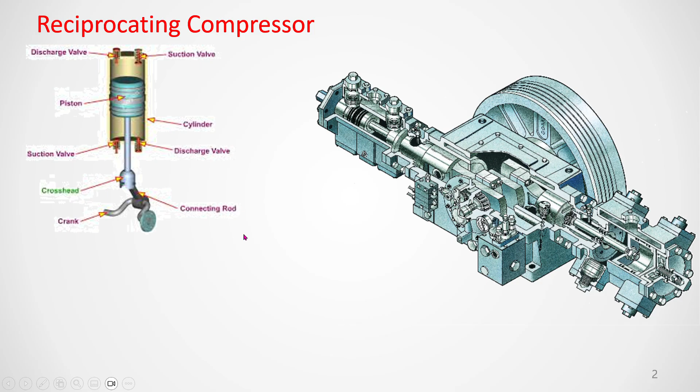So this is the reciprocating compressor. If you see the diagram, this one is your two stage. This one is the crankshaft, this is the web portion. This is the connecting rod, this is the big end bearing, this one is the small end bearing. This is the crosshead, this is the piston rod, and this is the piston. Both these sides have suction and discharge valve. This one is the flywheel, this is the bearing, this is the body, and this is the oil console.

You see the other diagram also. This is the crankshaft, this is the connecting rod, this is the crosshead, this is the suction. This is a double acting type. This is the suction and discharge valve, this is also a suction discharge valve. This is the piston. So the mechanical arrangement transmits motion into the piston's displacing action.

The inlet valve allows a quantity of air to enter into the cylinder. When they move up, suction valve will open, fresh air will go in, and from the discharge side the suction valve will close, discharge valve will open. From there it will go to the process, and in the cylinder it is compressed and discharged. The discharge valve prevents back flow of gas into the cylinder during the intake cycle, so when this is down, it will not allow air from the discharge side back to the suction side, only from suction side into the cylinder.

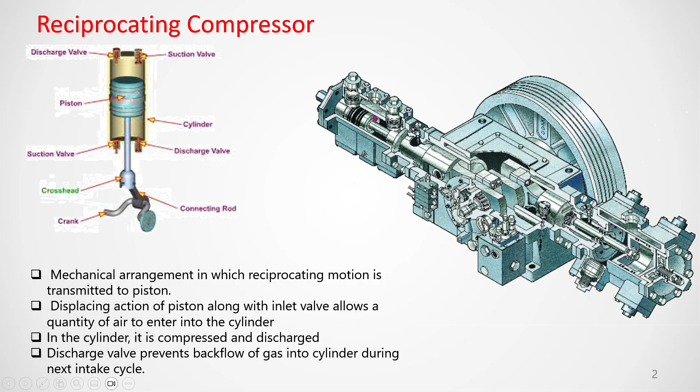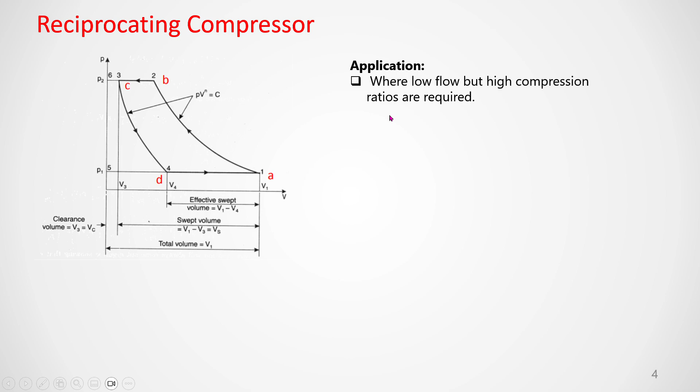And this is the PV diagram of a reciprocating compressor. Reciprocating compressor application is where low flow and high compression ratio are required - that is when we use a reciprocating compressor, and where the gas is dry.

Now the PV diagram goes A to B, D to A. It is suction at P1 pressure and T1 temperature - the pressure will remain same and temperature also remains same. Now what is the volume? This is V, this is volume, and this is VD, so this much volume will go inside the cylinder - that's D to A. Next is A to B compression, compressing from here to here; both valves are closed during compression.

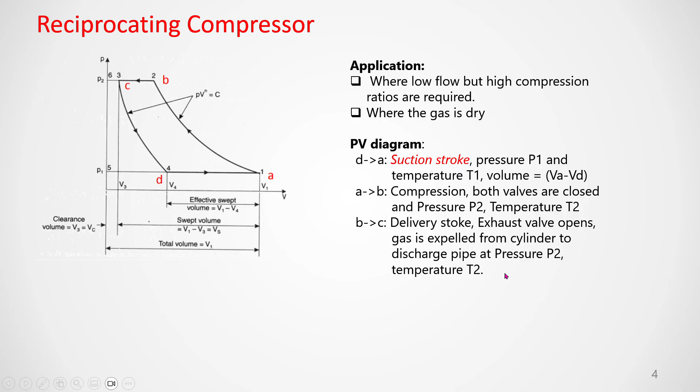Both valves are closed at pressure P2 and temperature T2. Pressure will increase from P1 to P2, then B to C, the delivery stroke, at pressure P2 and temperature T2. The exhaust valve opens and gas will expel from the cylinder to the discharge pipe.

Again, C to D, it will expand during the expansion stroke as the piston moves to the bottom, and the residual gas at the top of the piston head and cylinder head will expand at pressure P1.

The residual gas inside the cylinder, due to the clearance volume, expands until the pressure becomes P1 and temperature T1. Now the volumetric efficiency is the ratio of actual flow, V1 minus V4, to theoretical flow, which is V1 minus V3.

So V1 minus V4 is the actual flow done inside the compressor, and V1 minus V3 is the theoretical flow. So volumetric efficiency is the ratio of V1 minus V4, the actual, to V1 minus V3, the theoretical.

Free air delivery means the volume of air delivered by the compressor at intake condition, not at P2 and T2, but at P1 and T1 — the intake pressure and temperature.

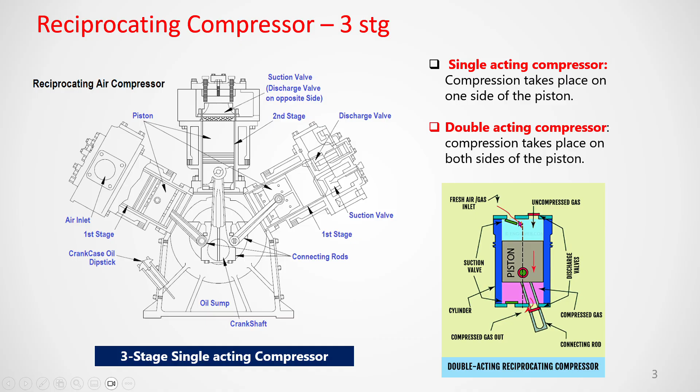Now, the key reason for providing the clearance — if you see the compressor picture, from the top dead center there will be some clearance so it will not touch the cylinder head. That air present there is called the clearance.

Why is the clearance volume provided? First, for mechanical safety — it prevents the piston from hitting the cylinder head. If this clearance is not there, the piston can hit the cylinder head, causing severe damage to the piston. That's why clearance is maintained.

Second, thermal expansion — due to high temperature, everything will expand, including the piston and piston rod. To accommodate this, the cylinder casing is jacketed so the temperature does not rise too much, but the piston and piston rod will still expand since they are subject to high temperature, so some permission must be provided. If no clearance is provided, the piston will touch the cylinder head and can damage it or even jam.

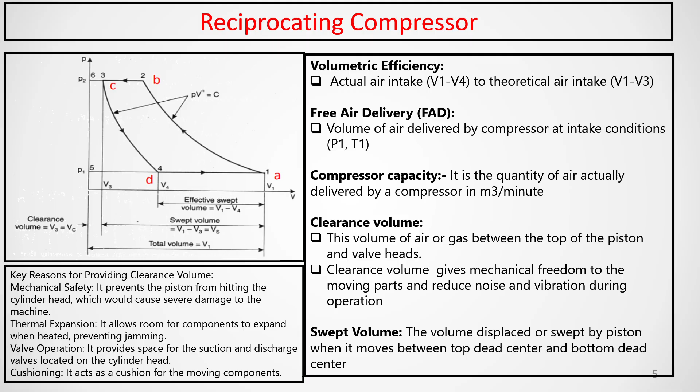Third, valve operation — due to suction and discharge valve operation, it needs some space, which is why clearance is also provided, and it gives a cushioning effect too. These are the four reasons we provide clearance volume, measured from the piston head top to the cylinder head bottom.

Now, compression takes place in the cylinder of a reciprocating compressor through three processes: isothermal, where temperature remains constant; isentropic, where heat transfer remains constant (zero); and polytropic, where heat transfer can take place.

In the isothermal process, shown as C1, P2, P1 and B, the work done will be less. In the isentropic process, the work done will be very high, since isentropic means no heat is given to the system.

So the efficiency of a reciprocating compressor is lowest during adiabatic isentropic compression, because this process involves the highest temperature rise, leading to maximum work input for a given pressure ratio. Conversely, isothermal compression provides the highest efficiency.

In actual practice, the process is usually polytropic, since pure isentropic or isothermal conditions are not possible.

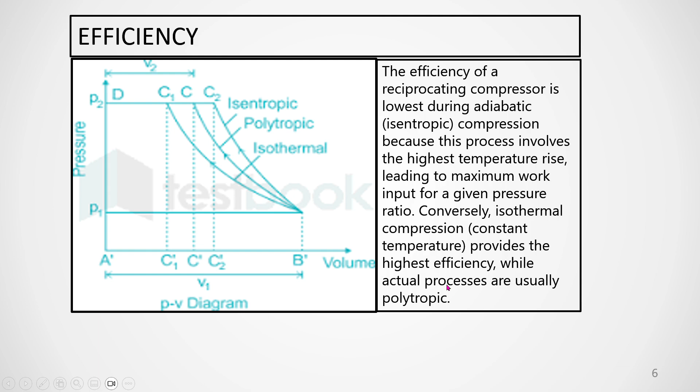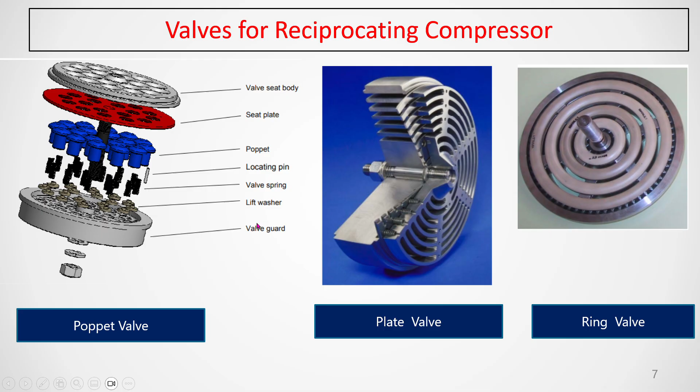When the pressure is there, this head will operate, closing this passage and closing this passage, so your valve will open and close as per the direction of the valve. Like this, the poppet valve, plate valve, and ring valves are available, used in the reciprocating compressor.

There are other parts also we use in the reciprocating compressor. This is called the piston, and that is the oil seal or rotary shaft seal. It is called shaft seal because when your compressor is running, the bearing crossheads are also oil lubricated, so there is a chance that the oil can go inside the cylinder.

If you are using the shaft seal, oil will not go into the cylinder. This is the three pieces ring that is mounted on the shaft, mounted with spring force. When there is a gap, that means a lot of force is there. But once it is mounted tightly on the shaft or piston, once the piston is moving inside this, this is the radial cut.

This one is the tangential cut. You see, this is the tangential cut. This one is tangential cut, and here there is a gap.

This one is called uncut backup ring. These two are called uncut - there is no cutting - backup ring. So once the pressure from this side comes, the air pressure will cross all these three, four rings.

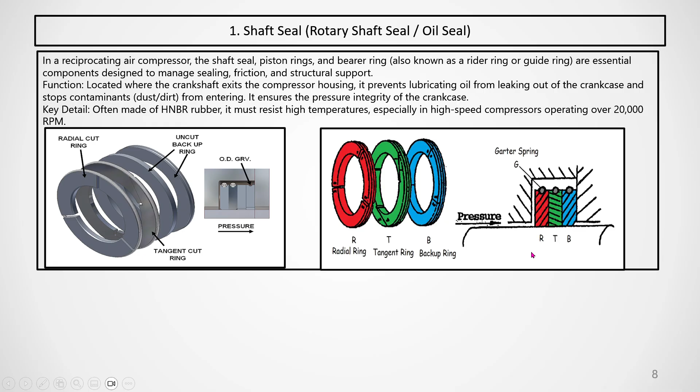Now, this is the piston ring. You see, this one is the piston. This is the groove where the piston rings are sitting.

The piston ring: air can come from here and push inside the piston, pushing it outside. This is the cylinder outside, so it will be tightly fitted against the cylinder. But leakage can take place if it is not properly seated in the piston seat, because due to air or fluid pressure, it will come here and give pressure against the cylinder, making it touch tightly, but if there is any gap, it can go outside.

So you have to check whether this is perfectly sitting on the piston upward side, so that no air can go. When it is moving up and down, this side will be high pressure, so high pressure air will come here from the cylinder and piston, wherever there is a clearance. It will push it in that direction, so it will be tightly fitted.

There are two piston rings we are using. If any leakage is there, it will come here and push it. Due to the air leak, pressure difference, air can come or fluid can come and push it to this side. But if it is not properly seated, then leakage can take place.

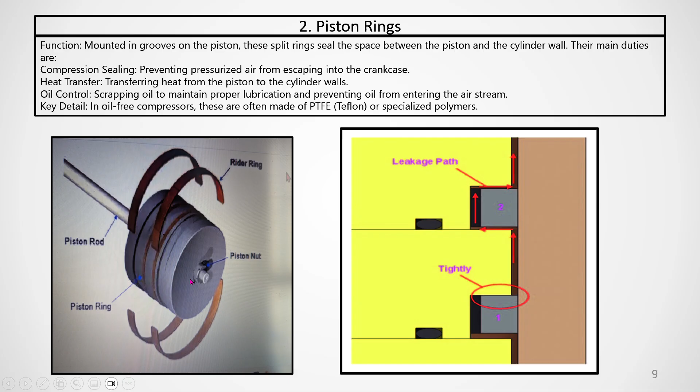But bearer rings are normally in a single piece, so you have to remove the two pistons in two pieces. There are two pieces of pistons. You have to remove the pistons, push it, place it there, and then put the top cover.

Then tighten it, and it will be a single piece with higher thickness than the piston rings. It will just be touching, keeping the piston in center position, giving stability and structural support for the weight of the piston. Due to the weight of the piston, the aluminum body may touch the cylinder body, so this will make a uniform gap and not allow any touching of the piston to the cylinder.

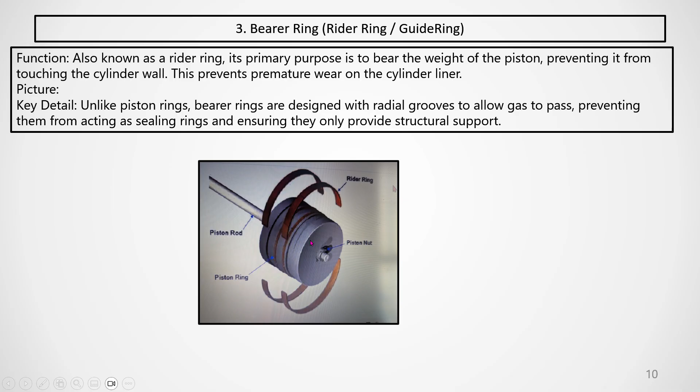Comparison summary: the shaft seal prevents oil leakage or dirt ingress, located at the crankshaft exit. The piston ring seals compression transfer, otherwise air can go inside from the discharge to suction through the double acting, or it can go outside also. So this is the perfect seal work, acting as a sealing, and this is the bearer ring also, on the piston grooves.

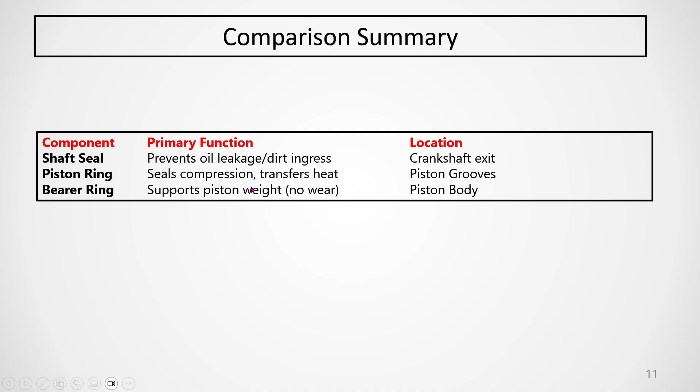Here also the support ring is between the piston and cylinder, in between the piston ring and piston grooves only, but it will hold the weight of the piston, and it is also in the piston body. Its location is the piston body.

So then this is the crankshaft. You can see this is the crankshaft. This is the big end bearing, these are the two big end bearings. These are the weights, to balance the centrifugal force, and this big end bearing needs lubrication.

So in normal cases, what happens: these holes are provided, and from here the lubricating oil will go inside, and there are annular grooves or holes. Through this, the oil will come outside and the big end bearing will be lubricated. This is the big end connecting rod bearing. This is the connecting rod.

This is the big end bearing. From the big end shaft journal, oil will come to the bearing, which is made of two halves. Lubrication happens there, and there is also a hole. From here it will go to the small end bearing, lubricate there, and then go outside.

So the crankshaft is the main part of the compressor. It is driven by a motor, either directly coupled or with belt coupled, with a pulley. The crankshaft converts the rotary motion of the motor into reciprocating linear motion.

It is rotating, and this is the journal portion. This converts rotary motion into linear motion with the help of the connecting rod. This connecting rod is the connecting piece between the crankshaft and the piston, and transfers power.

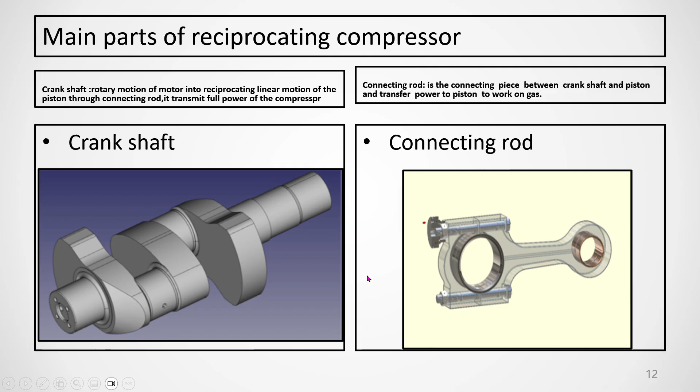Then this is the piston. Normally the piston is made with grooves, as I've told you. The first two are the piston rings, and the second one is the bearer ring.

This is the pin, where it is connected with the connecting rod. This is made of aluminium, to make it lighter.

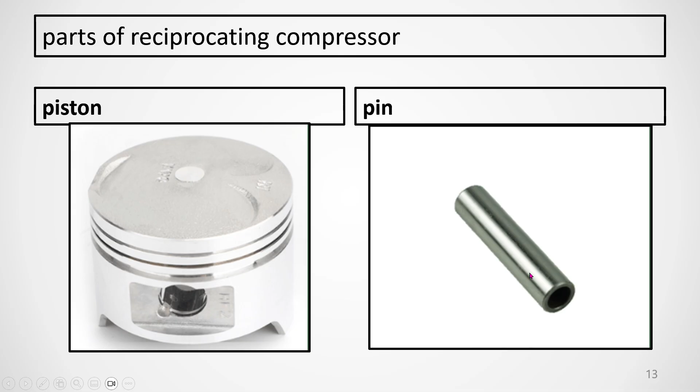And this is the connecting rod, connected here where it is the pin. That was the small end bearing connected with the piston.

But when length is an issue, with the distance piece, we can use the crosshead to make the linear motion more perfect.

So these are the parts of the reciprocating compressor.

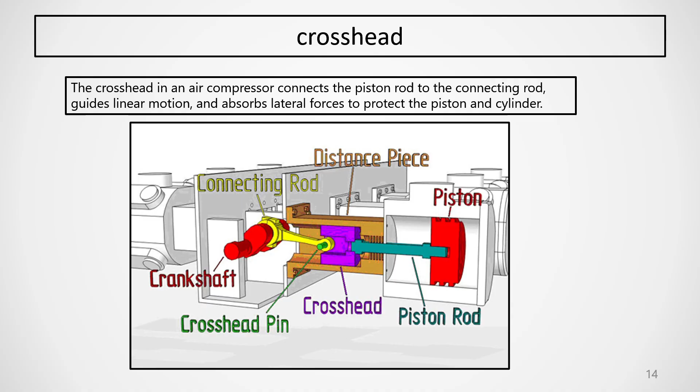The reliability of a reciprocating compressor depends largely on the valve reliability. No other part of the compressor is more susceptible to gas conditions and process upset than the valve. Valves are relatively inexpensive but fail frequently in operation. Hence, a lot of research and development has happened on compressor valves to improve their reliability.

Because the valve, whether double acting or single acting, goes through opening and closing repeatedly — that's why a lot of operation takes place, and that's why it fails frequently.

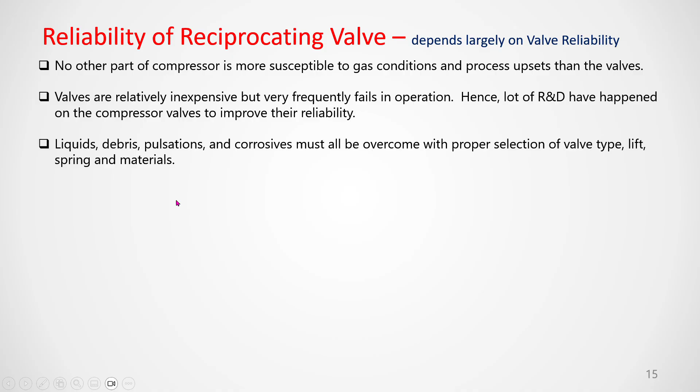Liquid, debris, pulsation, and corrosion must all be overcome by proper selection of valve type, lift, spring, and material. Whatever spring and materials we are using, we have to take care of that. Then only will the valve life increase.

Then the seat and stop plate — the poppet valve I showed you, if there are scratches, it can pass, so you have to lap it. Proper selection is needed, as the spring is also sometimes broken.

So these are the material as well as the quality considerations. You have to select the material very religiously so that it should not fail.

The stop plate and material should have sufficient hardness to combat wear, and the spring pockets are extremely important because they are items which can fail. It's usually desirable to design holes in the seat and stop plate as large as possible, to allow dirt, liquid, and other incompressible substances to pass more freely through the valve.

These are the materials, and nowadays they are using PEEK material, which gives better life. It's preferred as a valve material.

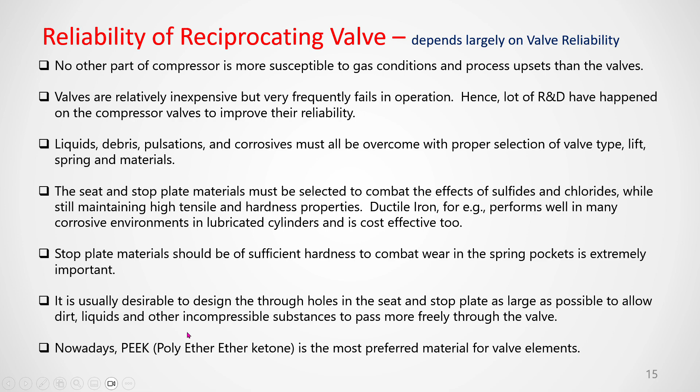Now, why are flywheels used? The flywheel prevents fluctuation of speed, because there is fluctuation during suction and discharge. On the discharge side, during compression, a lot of force is required, while during suction no force is required. So during suction, the flywheel absorbs energy, and during discharge, this energy is given back to the compressor, so that the RPM remains more or less fixed, with no pulsation.

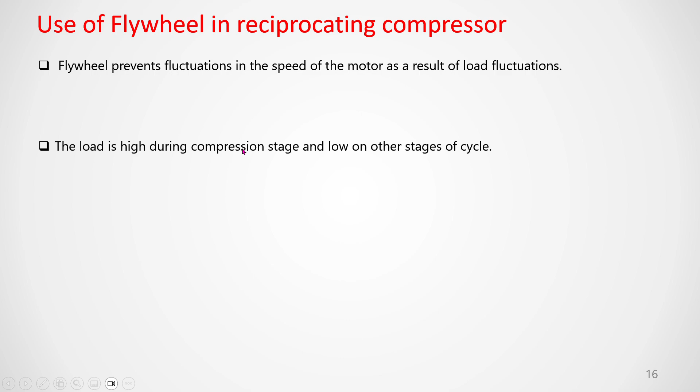That's why the flywheel has been provided. During suction operation, it absorbs energy, and during discharge operation, it gives the energy to the crankshaft, so that there should not be any change in RPM.

Now, for how to control the compressor capacity: this is the air intake, this is the filter, this is the suction valve, this is the motor, this is the compressor, this is the discharge valve, this is the check valve, this is the receiver.

From the receiver, there is a pressure switch. When the pressure increases, it will move the pilot piston against the spring force, and this port will come here. In normal cases the pressure is low, so due to spring force, the pilot piston will be on this side, and this pilot port will come here, and no air will go outside.

But when the pressure is more, due to this pressure switch, the piston will come to this side, and the air connects through here to there, so it will go outside. This means air or fluid will go outside, which is a loss of energy and loss of fluid. This unloading process is called venting, meaning loss of energy and loss of fluid.

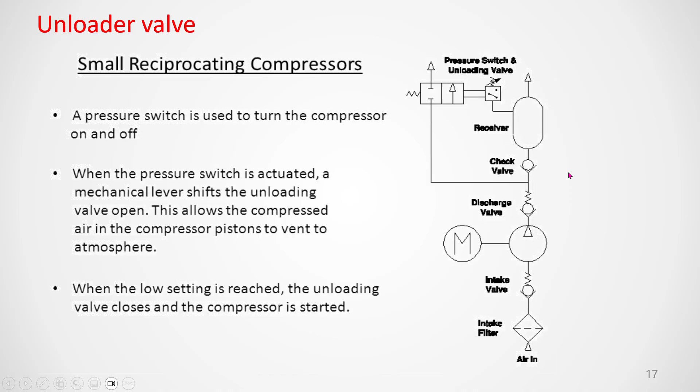Unloading means something different. You see, this is again the air intake, this is the suction valve, this is the compressor, this is the motor, this is the discharge valve, this is the receiver, and this is the pressure switch. Once the pressure is high, it gives a signal.

When it gives signal, this port will come here, the discharge side signal connects to this line, and this opens the suction valve. When the suction valve remains open, even if the compressor is working, there will be no discharge, because instead of going to discharge, the fluid will be trapped inside the suction side since this valve is open.

Discharge is only possible when the suction valve closes and the discharge valve opens, then only fluid can go out. But if the suction valve is open, it will just go on reciprocating on this side, with no fluid discharge taking place. Once the pressure is high, this is called the unloading condition.

The suction valve stays in unloading condition. When the pressure lowers again, due to spring force, this will come back to its position, the suction valve will return to acting condition, and then the compression flow will be established again. This is a good process because, no doubt, it takes more energy, but there will be no loss of any fluid.

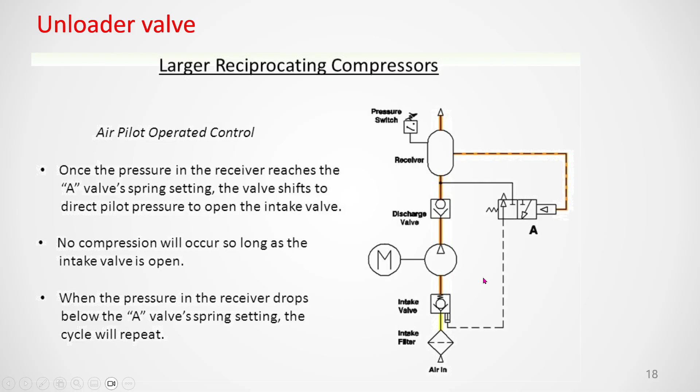So I think I've covered all the points of the reciprocating compressor. If you go through all the slides, all the parts have been described - the purpose of all these parts used in the reciprocating compressor, control systems, and the purpose of the piston ring, rider ring, and shaft seals has been well explained. Connecting rods, gudgeon pins, cross heads - everything is explained.